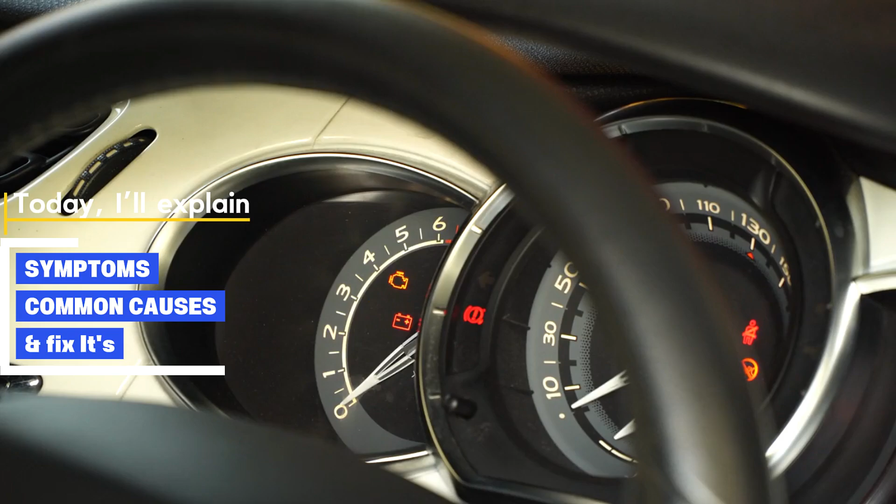If your Mercedes-Benz check engine light is on and your scanner shows P0366, don't worry, in this video I'll explain everything you need to know. We'll cover what P0366 means, the common causes, symptoms, and how to fix it step by step. Let's get started. P0366 stands for Camshaft Position Sensor B Circuit Range Performance Bank 1.

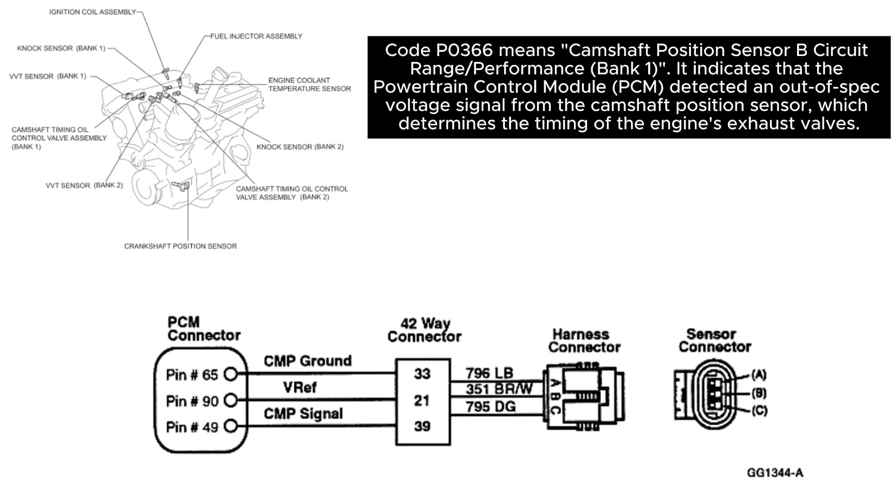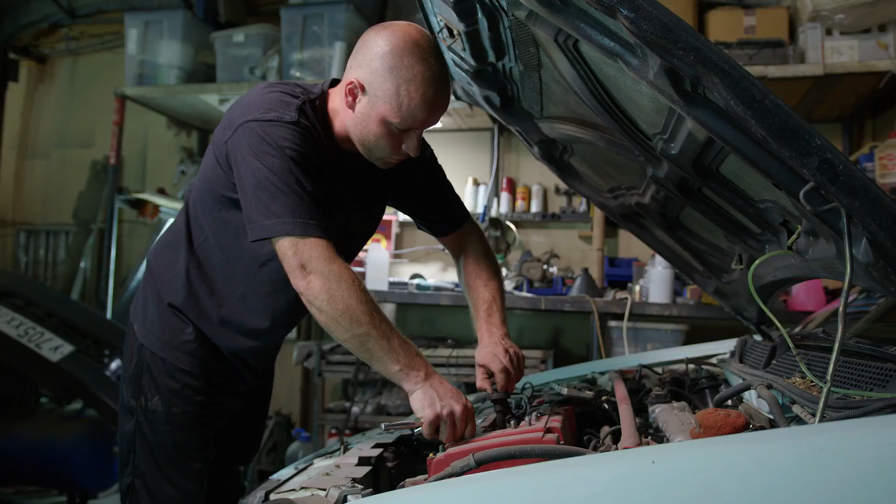This means the engine control module (ECM) is detecting that the signal from the exhaust camshaft position sensor on bank 1 is outside the expected performance range. Sensor B usually refers to the exhaust camshaft. Bank 1 is the side of the engine with cylinder number 1.

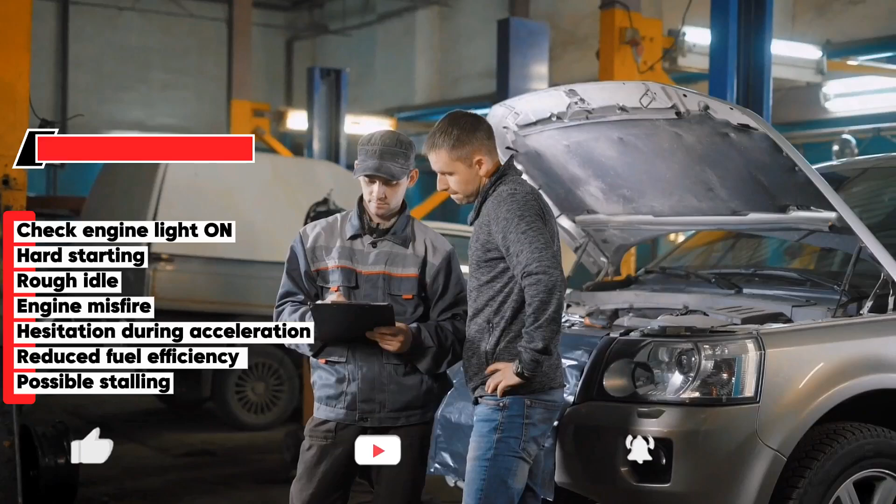With Mercedes-Benz P0366, you may notice check engine light on, hard starting, rough idle, engine misfire, hesitation during acceleration, reduced fuel efficiency, possible stalling.

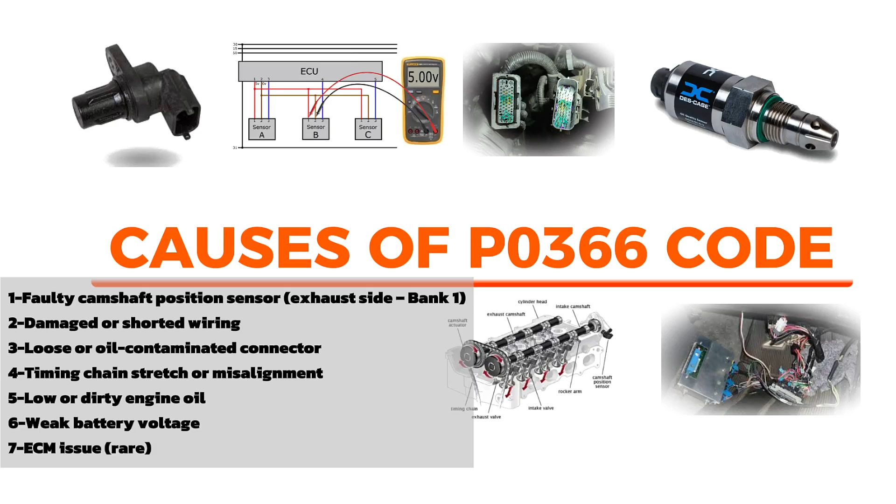The most common causes include: 1. Faulty camshaft position sensor, 2. Damaged or shorted wiring, 3. Loose or oil-contaminated connector, 4. Timing chain stretch or misalignment, 5. Low or dirty engine oil, 6. Weak battery voltage, 7. ECM issue (rare). It means that the engine control module detected the exhaust camshaft position sensor circuit is not within specifications.

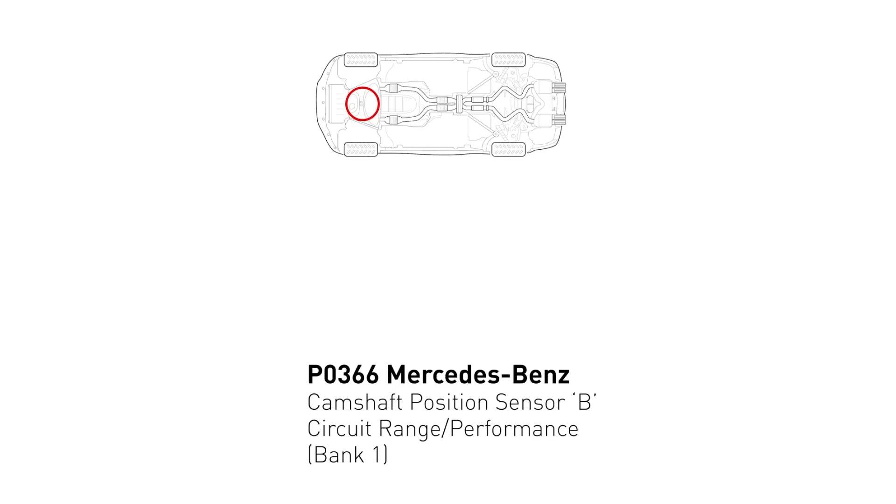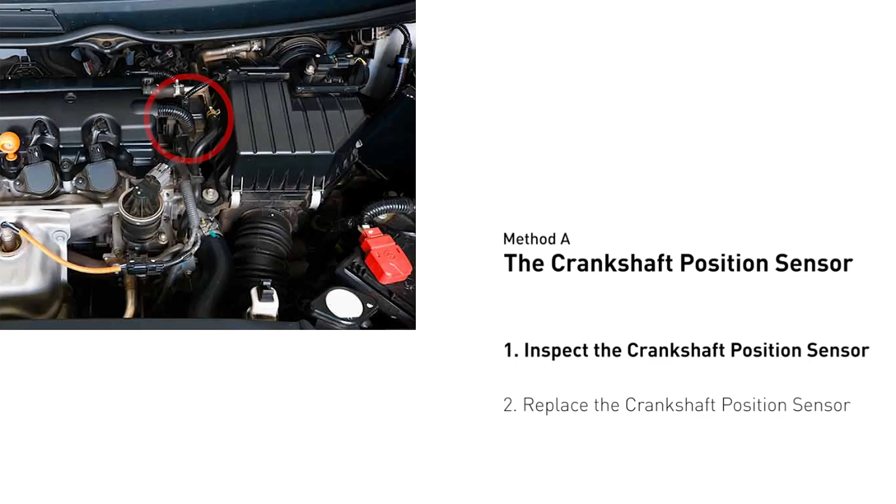Here are 2 of the most practical solutions to fix Mercedes-Benz's P0366 error code. Method A, the crankshaft position sensor. The crankshaft position sensor is most often located on the front underside of the engine. It can usually be found mounted to the timing cover. First, carefully remove the crankshaft position sensor from the vehicle. Visually inspect the sensor to make sure it hasn't been contaminated by a leak from another engine component.

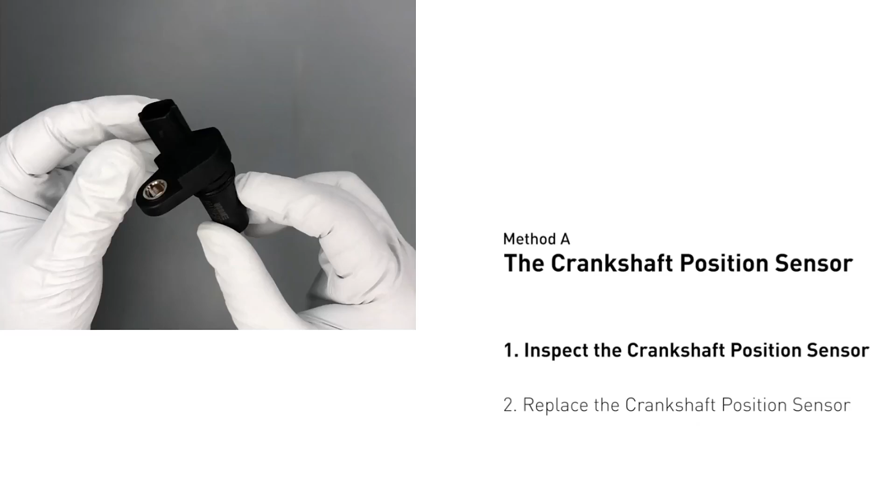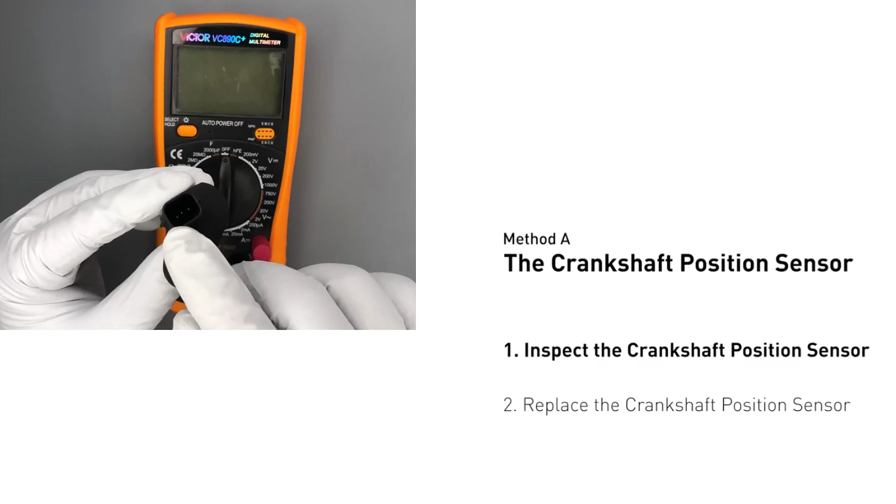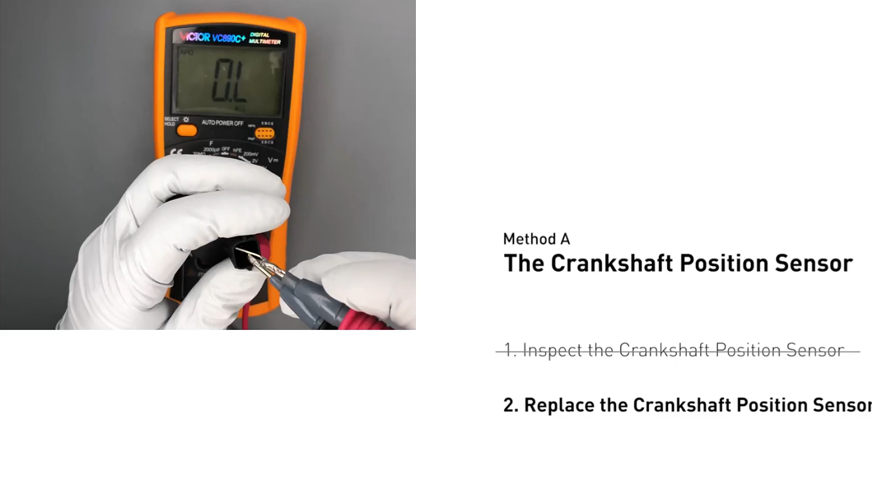Use a multimeter to proceed with a resistance test on the crankshaft position sensor. In order to get a correct reading, check your owner's manual to see the specific crankshaft position sensor resistance range for your vehicle. If you don't get a reading, this indicates that the crankshaft position sensor is faulty and needs to be replaced. Check to make sure the O-ring from the sensor hasn't fallen into its hole. Then replace it with a new crankshaft position sensor.

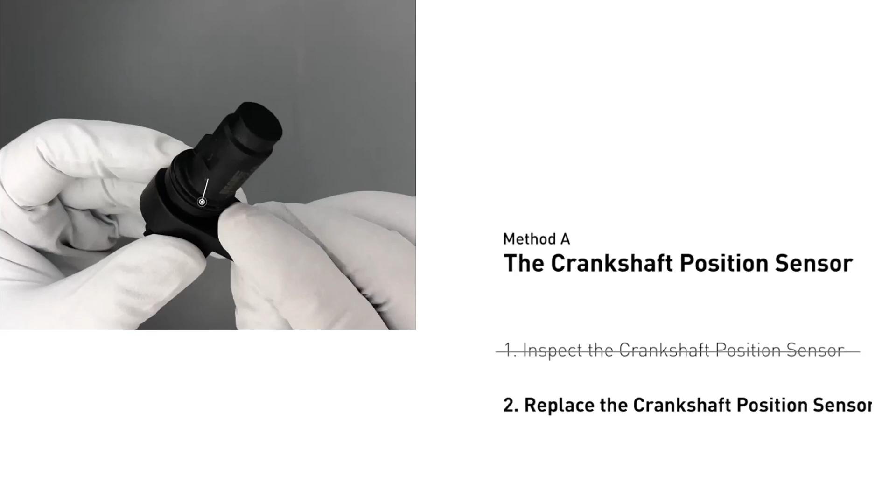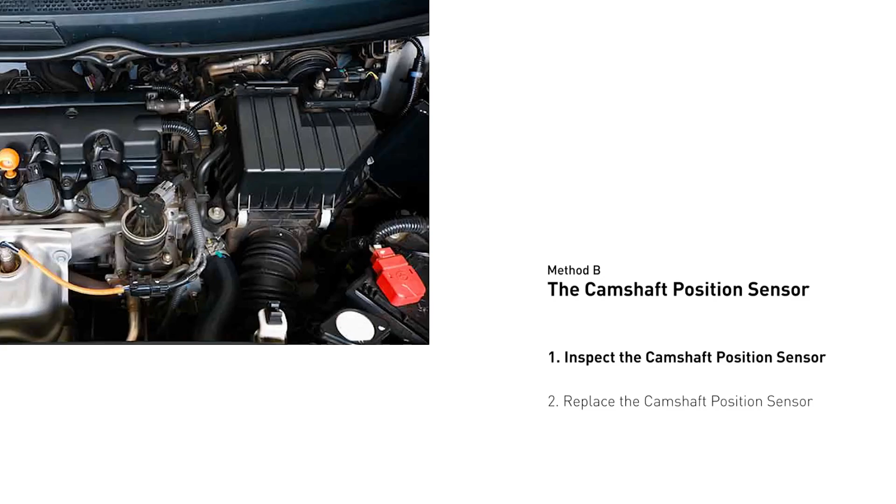Method B, the camshaft position sensor. The camshaft position sensor is located in the valve cover near the top of the engine, or it can be located at the front or rear of the cylinder head. First, carefully remove the camshaft position sensor from the vehicle. Visually inspect the sensor to make sure it hasn't been contaminated by a leak from another engine component.

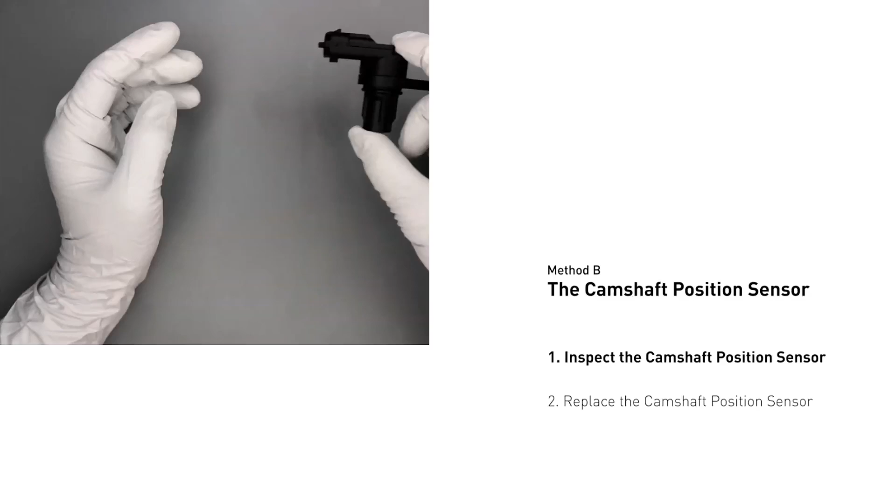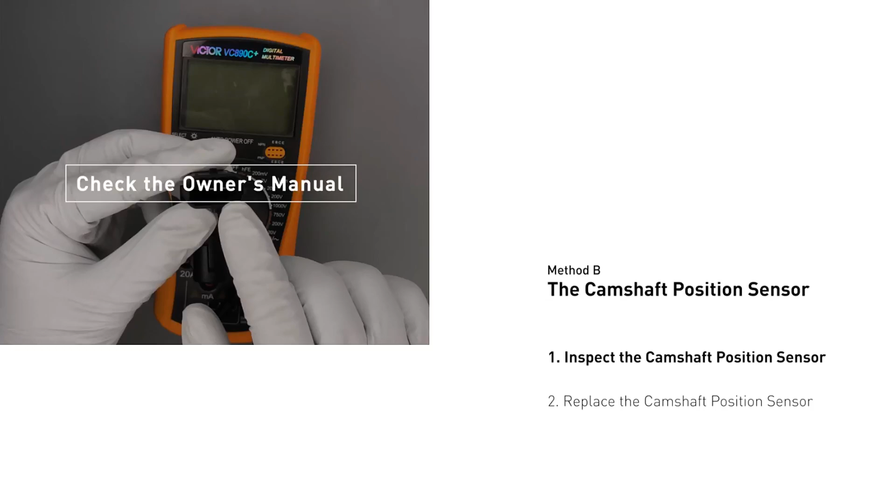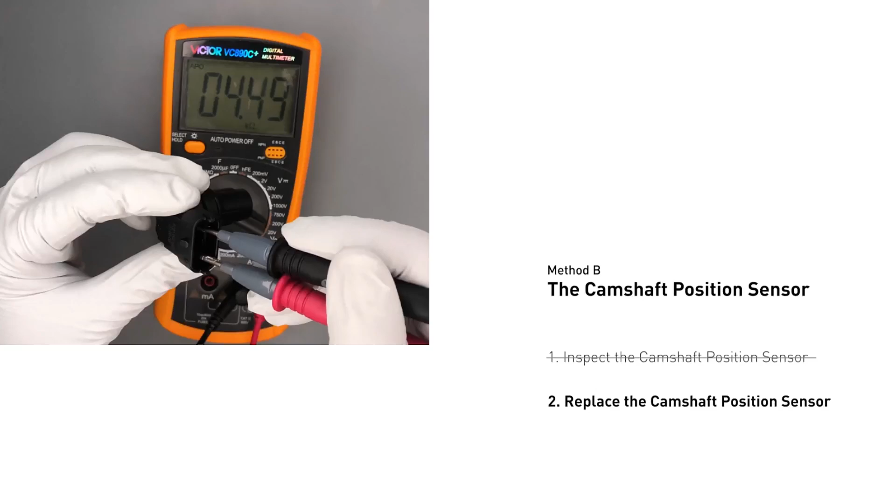Use a multimeter to proceed with a test on the camshaft position sensor. In order to get a correct reading, check your owner's manual to see the specific camshaft position sensor resistance range for your vehicle. If you do not get a reading, this indicates that the camshaft position sensor is faulty and needs to be replaced. Check to make sure the O-ring from the sensor hasn't fallen into its hole. Then replace it with a new camshaft position sensor.

So here are 2 of the most practical solutions to fix Mercedes-Benz's P0366 error code. After the repair, you can now use the OBD scanner to clear the error code, and tap the rescan button one more time to make sure everything is fine with your vehicle.